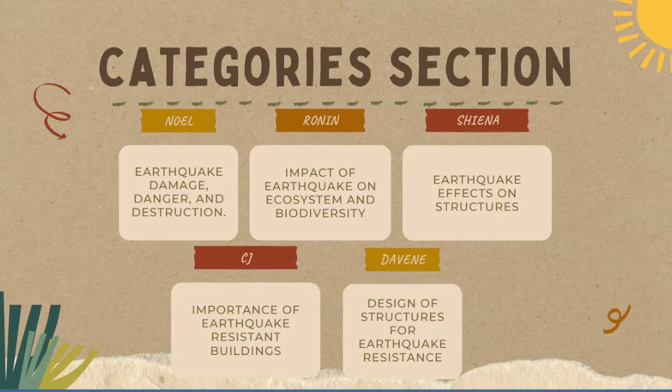So to start our new topic, let's ask ourselves how dangerous is an earthquake? To answer this question, as we all know, an earthquake is a natural phenomenon that happens on our planet that is still very dangerous, because up until now in our generation, we still do not have instruments that can know when or where these earthquakes can occur. These earthquakes are very dangerous because they trigger hazards such as safety hazards, environmental hazards, and other hazards.

Also, how do earthquakes cause damage? First we have ground shaking and structural failure. Ground shaking is the vibration of the ground during an earthquake. The shaking triggers other hazards such as liquefaction and landslides. Most earthquake damage results from the seismic waves passing beneath buildings, roads, and other structures.

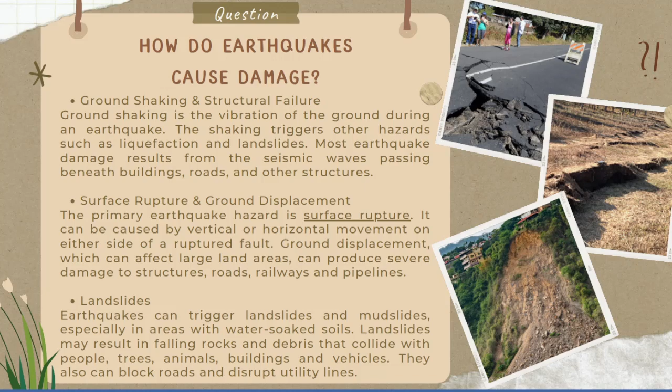Also, we have liquefaction. The shaking from an earthquake can turn loose soil into a liquid during an earthquake. Liquefaction can undermine the foundations and supports of buildings, bridges, pipelines, and roads, causing them to sink into the ground, collapse, or dissolve.

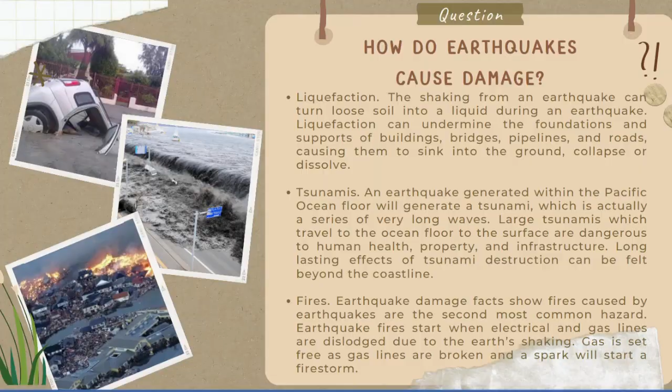Next one, we have the destruction caused by earthquakes. There are a lot of types of destruction that can be caused by these earthquakes, but we have the three most common destructions by earthquakes. First one, we have surface rupture.

The vibrations from an earthquake can lead to ground displacement and surface rupture. The surface rupture can cause other hazards as well as damage to roads and buildings. In this example, the surface rupture has caused large cracks and the collapse of a paved road. This could lead to injuries, loss of life, or impede people from getting home or to work.

When we say surface rupture, the damage or the effect can mostly be seen in our roads, pag hindi na ito na dadaanan kasi sira na or damaged na. It negatively affects the community, lalo na yung mga may work pa after the aftermath of the earthquake.

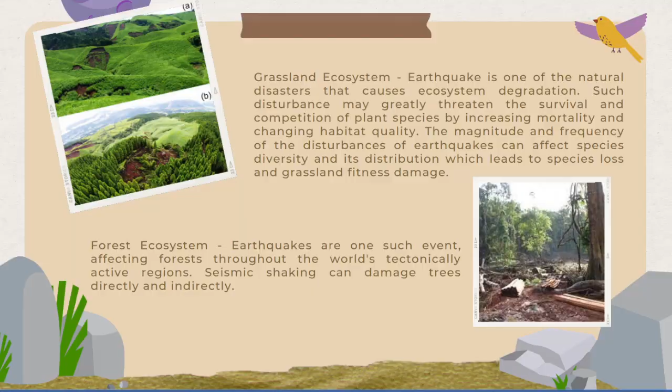Next is marine ecosystem. Underwater earthquakes are responsible for tsunamis, and even though it doesn't reach land, it damages population of life under the ocean. Earthquakes disrupt the ocean floor with the movement caused by quakes, which is most destructive during the occurrence of the earthquake. Sea mammals, fish, and especially corals and sea plants have nowhere to go when quake occurs, depending on the severity of it. The ocean floor and land ashore get lifted or drop even lower than it's meant to be. It causes havoc for anything that lives on or above it. It disrupts ecosystem.

How do earthquakes impact our biodiversity? Earthquakes and other natural hazards generally decrease biodiversity. They can either kill organisms directly or destroy their habitats so that they are no longer able to live in the area where the hazard occurred. Disasters negatively affect the biodiversity of wetlands, forest, and coastal systems by causing the spread of invasive species, mass species mortality, and loss of habitat. In the short term, select ecosystem degradation reduces the availability of forests to sequester carbon, which exacerbates climate change.

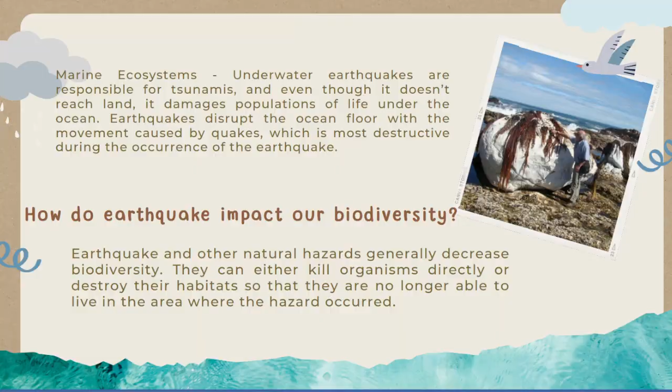Good morning, everyone. I'm Shiena Marceliana and I will discuss the effects of earthquake on structures.

First is inertia forces in structures. The generation of inertia forces in a structure is one of the seismic influences that detrimentally affect the structure. When an earthquake causes ground shaking, the base of the building would move, but the roof would be at rest. However, since the walls and columns are attached to it, the roof is dragged with the base of the building.

So the inertia forces can cause shearing of the structure, which can concentrate stresses on the weak walls or joints in the structure, resulting in failure or perhaps total collapse. More mass means higher inertia force, that is why lighter buildings sustain the earthquake shaking better.

Next is effect of deformations in structures. When a building experiences earthquake and ground shaking occurs, the base of the building moves with the ground shaking. However, the roof movement would be different from that of the base of the structure. This difference in the movement creates internal forces in columns which tend to return the column to its original position.

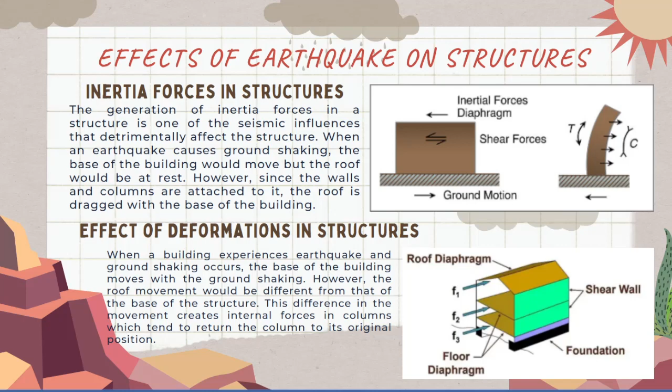So these internal forces are termed stiffness forces. The forces would be higher as the size of columns gets higher. The stiffness force in a column is the column stiffness times the relative displacement between its ends. Next po.

Horizontal and vertical shaking. Earthquakes cause shaking of the ground in all three directions X, Y, and Z, and the ground shakes randomly back and forth along each of these axis directions. Commonly, structures are designed to withstand vertical loads. So the vertical shaking due to earthquakes, which either adds or subtracts vertical loads, is tackled through safety factors used in the design to support vertical loads.

However, horizontal shaking along X and Y directions is critical for the performance of the structure since it generates inertia forces and lateral displacement, and hence an adequate load transfer path shall be provided to prevent its detrimental influences on the structure. So a proper inertia force transfer path can be created through adequate design of floor slab, walls or columns and connections between these structural elements.

It is worth mentioning that the walls and columns are critical structural members in transferring the inertial forces. It is demonstrated that masonry walls and thin reinforced concrete columns would create weak points in the inertia force transfer path. And the last one is flow of inertia forces to foundations.

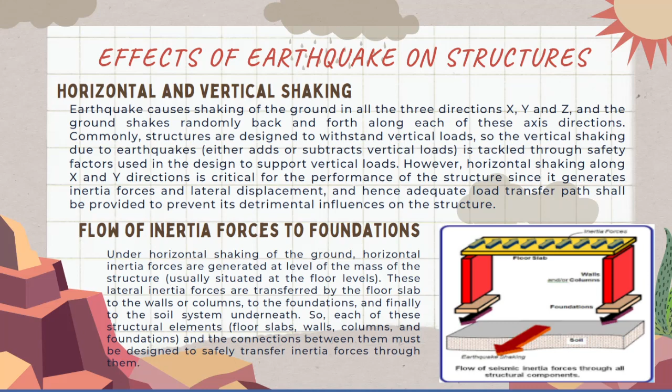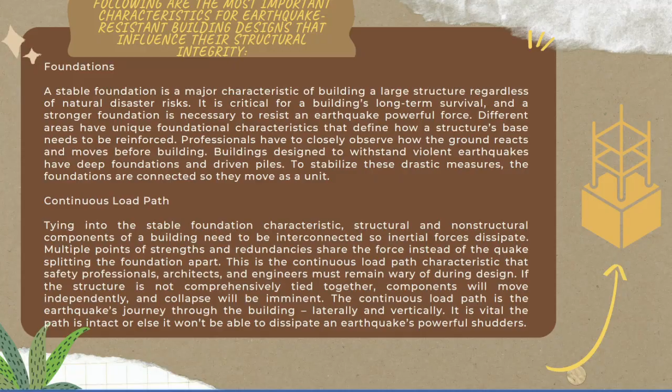So hello, I am John David Afrimintilla, and I am going to discuss and introduce to you the design of structure for earthquake resistant buildings. Over the past few decades, engineers have introduced new designs and building materials to better equip buildings to withstand earthquakes. While buildings are generally equipped to handle vertical forces from their weight and gravity, they cannot handle side-to-side forces emitted by quakes. These horizontal loads vibrate walls, floors, columns, beams, and the connectors that hold them together.

The difference in movement between the bottom and top of the building exerts extreme stress, causing the supporting frame to rupture and the entire structure to collapse.

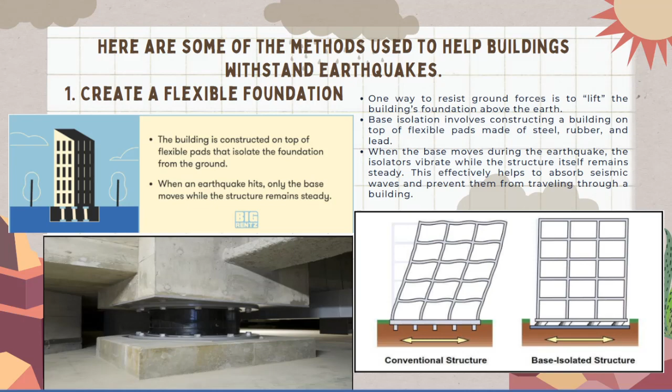So, the second one is to counter forces with damping. You might be aware that cars have shock absorbers. However, you might not know that engineers also use them for making earthquake resistant buildings. Similar to their use in cars, shock absorbers reduce the magnitude of shock waves and help buildings slow down. This is accomplished in two ways: vibrational control devices and pendulum dampers.

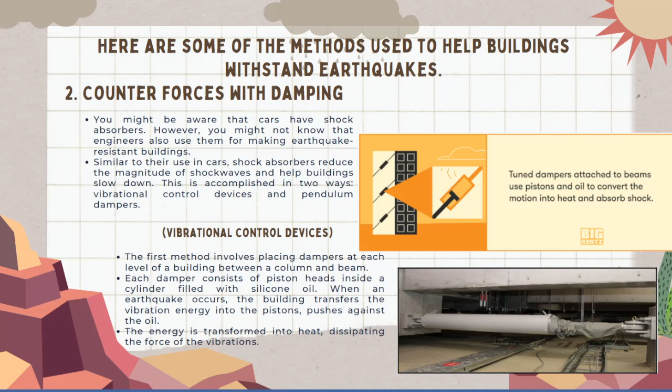So the next one is the principle of the pendulum. So, counter forces with damping. The first method involves placing dampers at each level of a building between a column and beam. Each damper consists of a piston head inside a cylinder filled with silicone oil.

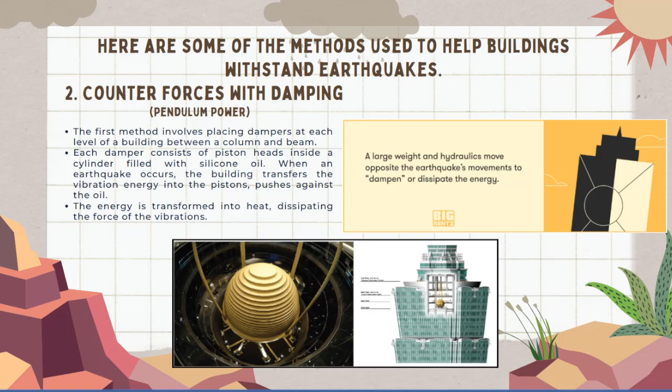So the next one is shield buildings from vibration. Instead of just counteracting forces, researchers are experimenting with ways buildings can deflect and reroute the energy from earthquakes altogether. Seismic invisibility cloak. This innovation involves creating a cloak of 100 concentric plastic and concrete rings and burying it at least 3 feet beneath the foundation of the building. As seismic waves enter the rings, they are forced to move through the outer rings for easier travel. As a result, they are essentially channeled away from the buildings and dissipated into the plates in the ground.

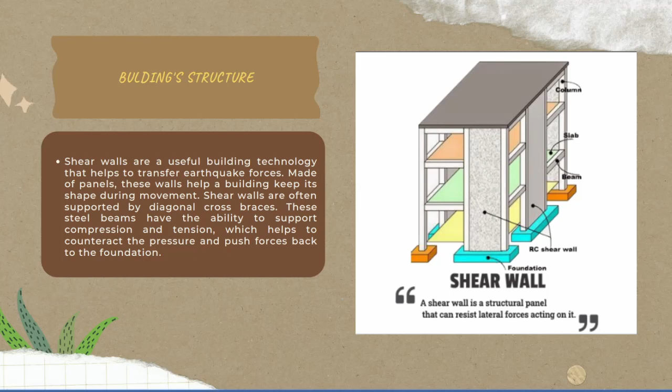So diaphragms are central parts of the building structure, consisting of the floors of the building, the roof, and the decks placed over them. Diaphragms help remove tension from the floor and push force to the vertical structure of the building.

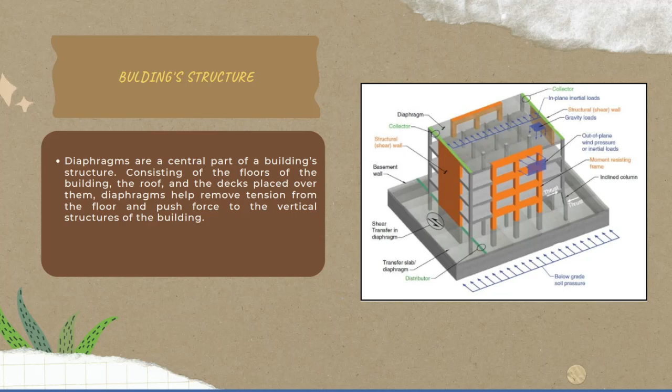So this is the moment resisting frame. Moment resisting frames provide more flexibility in a building's design. The structure is placed among the joints of the building and allows the columns and beams to bend while the joints remain rigid. Thus, the building is able to resist the larger forces of an earthquake while allowing designers more freedom to arrange the building elements.

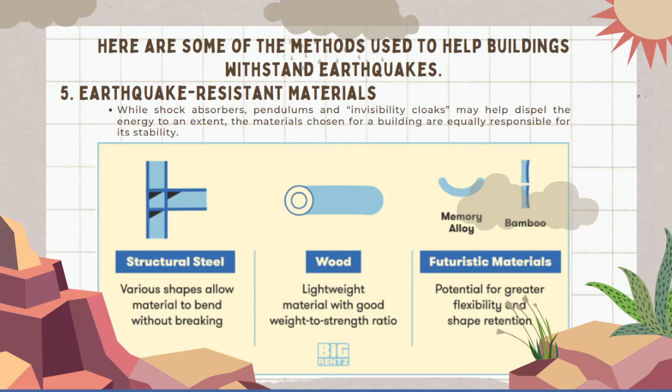So, steel and wood. For a material to resist stress and vibration, it must have high ductility, which is the ability to undergo large deformations and tension. Modern buildings are often constructed with structural steel, a component that comes in a variety of shapes and allows buildings to bend without breaking. Wood is also a surprisingly ductile material due to its high strength relative to its lightweight structure.

Innovative materials. Scientists and engineers are developing new building materials with even greater shape retention. Innovations like shape memory alloys have the ability to both endure heavy strain and revert to their original shape. Additionally, fiber reinforced plastic wrap made from a variety of polymers can be wrapped around columns and provide up to 38 percent added strength and ductility.